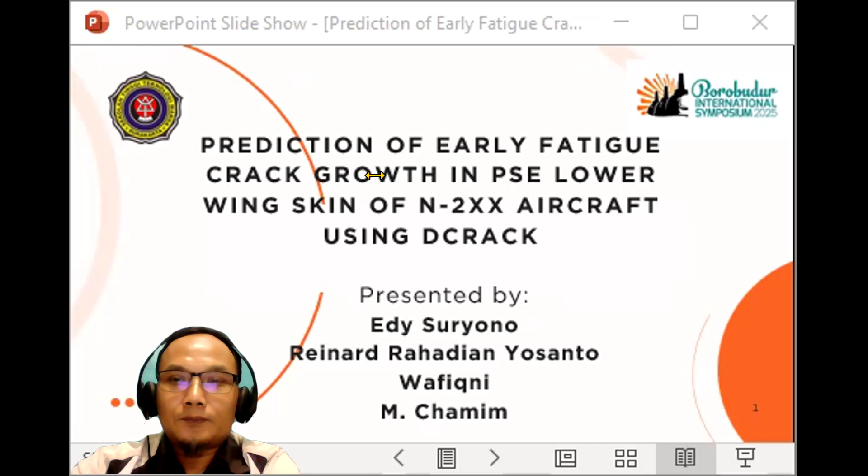Today, I will present our research titled Prediction of Early Fatigue Crack Growth in the PSE of the Lower Wing Skin of the N-2XX Aircraft Using DCRACK. This work was conducted by myself, Edy Suryono, from Mechanical Engineering Sekolah Tinggi Teknologi Warga Surakarta, along with Reinard Rahadian Yosanto from Mechanical Engineering Sekolah Tinggi Teknologi Warga Surakarta. Next, Wafiqni from Structural Design and Analysis, PT Dirgantara Indonesia, and Mr. Chamim from Mechanical Engineering Sekolah Tinggi Teknologi Warga Surakarta.

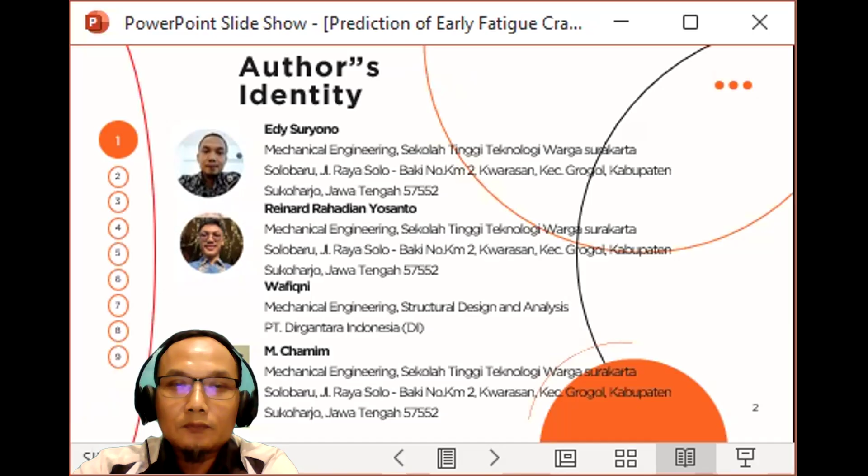My agenda for the presentation. First, background to the problem. To start, let me give you a brief background of why this study is important. Aircraft structures experience repetitive loads during flight, during takeoff, landing, turbulence, or even routine maneuvers. Over time, these loads create fatigue, and fatigue can initiate tiny cracks in structural components.

One of the most critical components is the principal structural element, or PSE, located in the lower wing skin of the N-2XX aircraft. This section carries the main bending loads generated by aerodynamic forces. Because stress concentrates in this region, small cracks can form and grow gradually. If these cracks continue to grow unnoticed, they can reach a dangerous length and might lead to structural failure.

Previous studies by Reymer and Aisyah emphasized that geometric features and stress distribution greatly influence crack growth behavior. This inspired us to take a closer look, not only to understand the crack pattern, but also to support better maintenance planning. With this background in mind, our study aims to answer a key question: how do geometric factors and stress concentration affect early crack growth in the lower wing skin structure? In particular, we compare two different regions which we refer to as skin A and skin B.

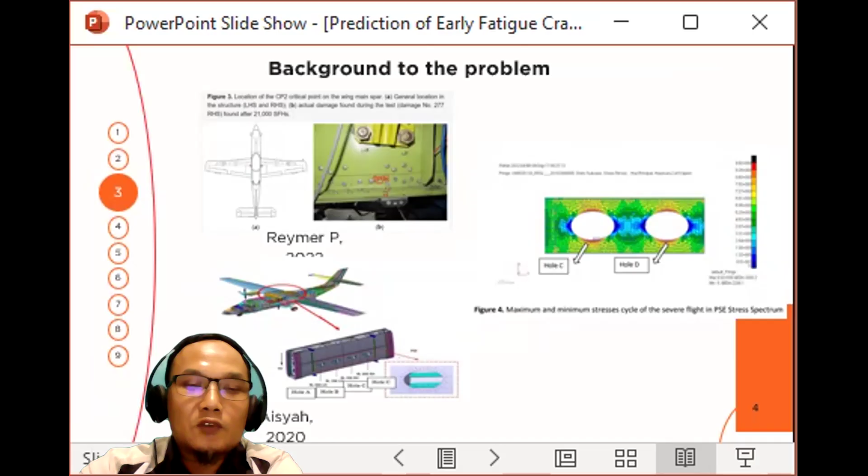By understanding this difference, we hope to contribute to safer flight operation through better prediction of inspection intervals and service life estimation. Our study is also linked with the latest guidelines from regulatory bodies such as the FAA and PTDI regarding structural inspection for aging aircraft.

To conduct our analysis, we use a software tool called AFGROW. For those who might not be familiar with it, AFGROW is a program specifically designed to predict fatigue crack growth by considering real operational loads. The software requires several key inputs. One, material properties of AL 2024-T351. Two, flight spectrum data. Three, the beta factor.

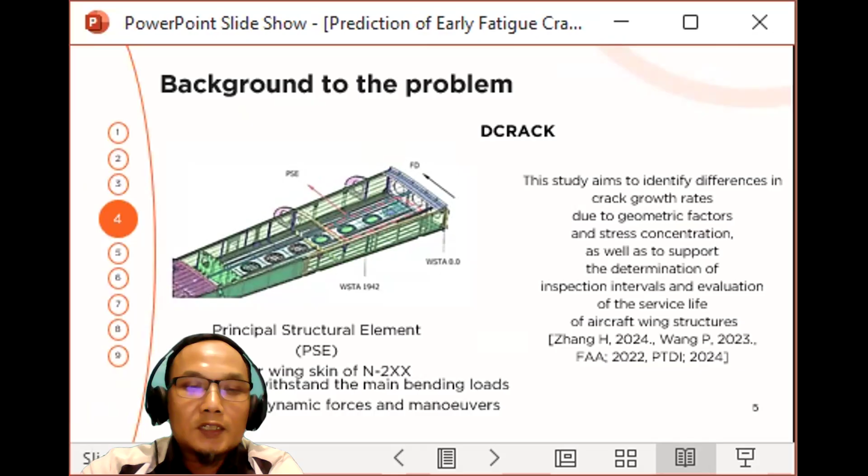As highlighted by Aisyah, the beta factor is critical because even a slight change in geometry can significantly accelerate or slow down crack growth. With all these inputs, AFGROW generates a prediction of how cracks develop over time.

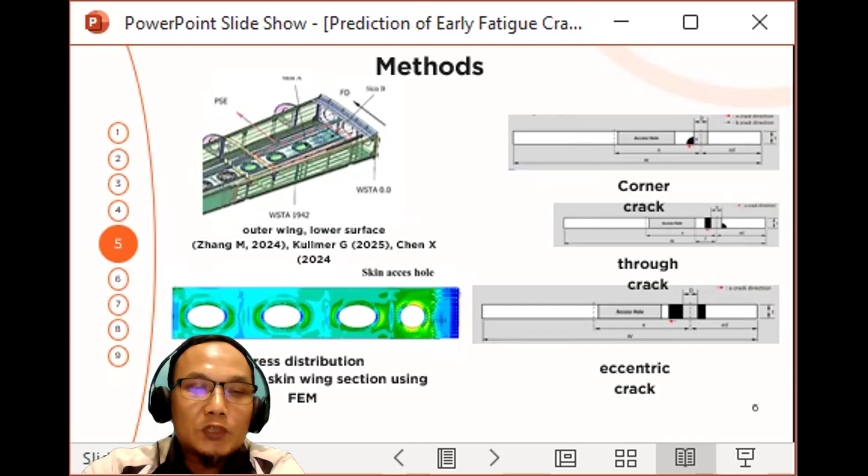Our methodology combines both FEM and AFGROW simulation. First, we analyze three potential crack types: corner crack, through crack, and eccentric crack. These crack types were selected based on previous studies from Zhang, Kullmer, and Chen, who examined similar conditions in lower wing structures. Then, using FEM, we determined the stress distribution across the wing skin. FEM also allows us to visualize which areas experience the highest stress and are therefore more likely to initiate cracks. The stress results from FEM were then input into AFGROW to simulate crack propagation under real flight conditions.

Let's move on to the results, starting with skin A. Skin A displays a two-stage crack growth pattern. In the first stage, from flight 1 to 600, the crack grows in a linear and predictable manner with an average increase of 4.758 millimeters. However, once it reaches around 600 flights, we see a drastic change. The growth rate jumps from 1.642% to over 20%, which is a sign of rapidly accelerating damage. This exponential trend is alarming because it indicates that the structure is moving towards a critical failure condition. In other words, once the crack reaches a certain size, it grows very quickly and becomes difficult to control through regular maintenance intervals.

Skin B. Skin B shows a much more stable behavior. Throughout the simulation period up to 1,200 flights, the crack grows linearly with an average growth of 6.566 millimeters and only a slight increase in the growth rate, around 1.18%.

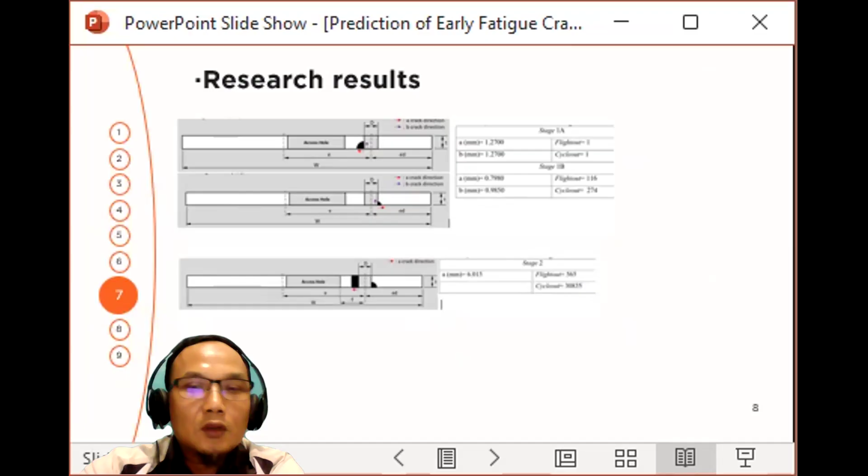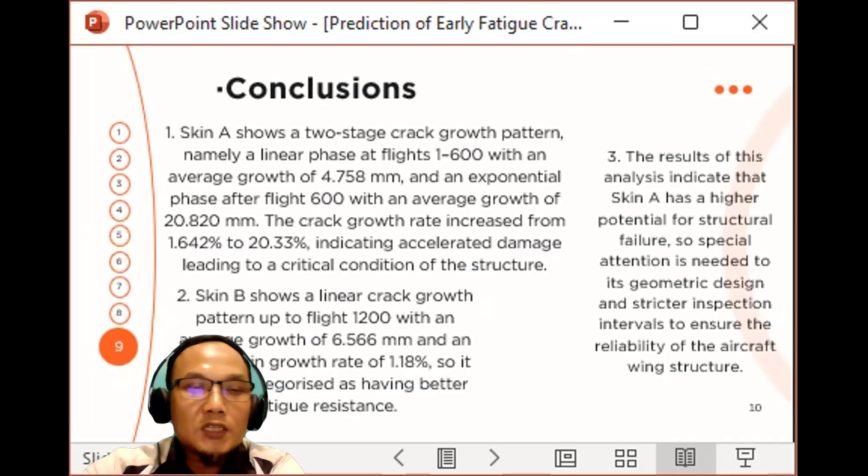To summarize, skin A shows a two-phase crack growth pattern with a dangerous exponential increase after 600 flights. Skin B shows a safer linear crack growth pattern, indicating better fatigue performance. Therefore, special attention must be given to skin A in terms of design, monitoring, and inspection frequency. This research highlights the importance of combining FEM and AFGROW simulation to support maintenance planning, structural evaluation, and aircraft safety assessment.